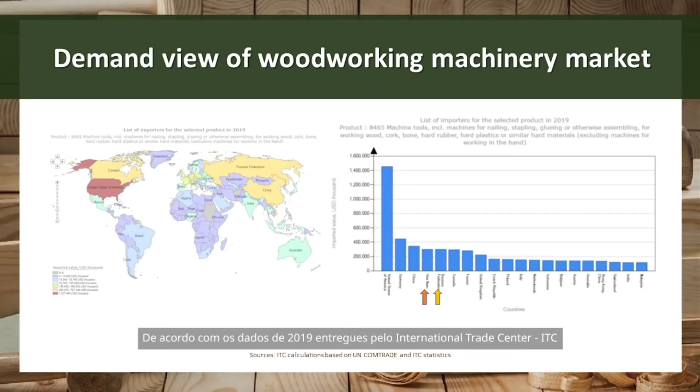Since Wood Taiwan is dedicated to promoting global woodworking machinery, it is very important to know who buys machines. According to the International Trade Center, ITC's data in 2019, USA bought more than $1.4 billion, standing as the world's largest importer, followed by Germany and China. Emerging markets, Vietnam, Russia, were ranked number 4 and number 5.

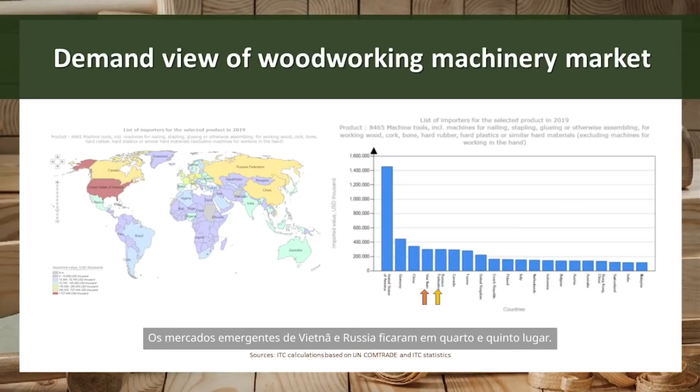On the other hand, when we examine the supplying side, Germany pops up to take the lead with exports of $2 billion, followed by China and Italy. And Taiwan was the number 4 supplier of worldwide woodworking machinery. In 2020, Taiwan shipped $700 million more US. And I would like to elaborate a bit further on what kind of machines we've shipped and who buys them from us.

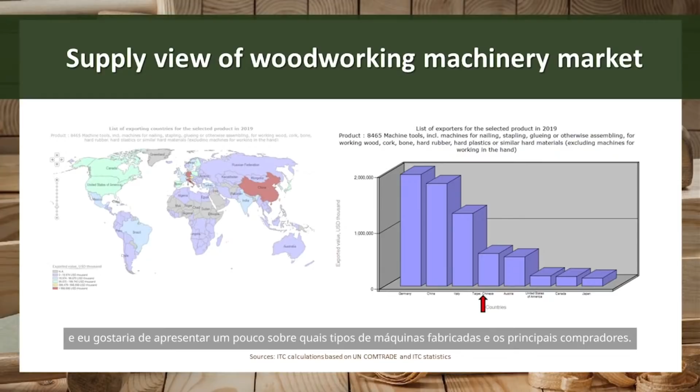You might ask, what makes us different from others? The main reason is we tailor machines according to customers' needs. Taiwan's machines enjoy a good reputation for high quality, reliability, and quick response to customers' demands after sales.

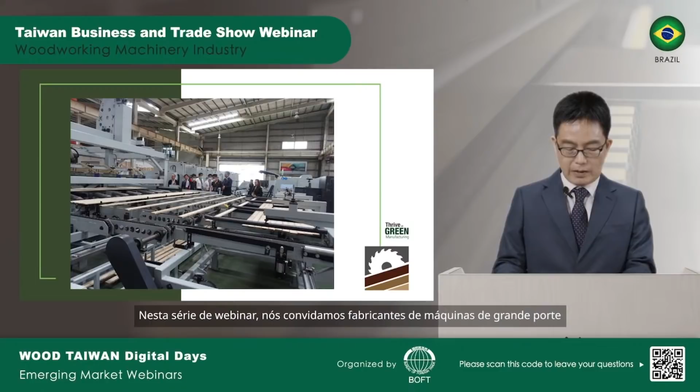In this webinar series, we've invited heavyweight machine makers from different applications, presenting their engineering crafts and solutions. Wood Taiwan is a perfect venue for you to explore the cutting-edge machines.

In the last exhibition 3 years ago, we had 167 exhibitors using 1,076 booths, showcasing their best products and know-how, attracting more than 900 buyers from the globe and nearly 5,300 domestic professionals to network with their counterparts.

The coming Wood Taiwan will be staged at TaiNEX 1. We look forward to your visit next year in Taipei. Thank you.

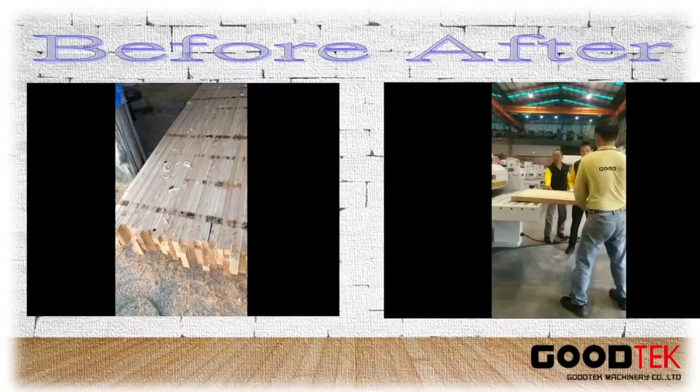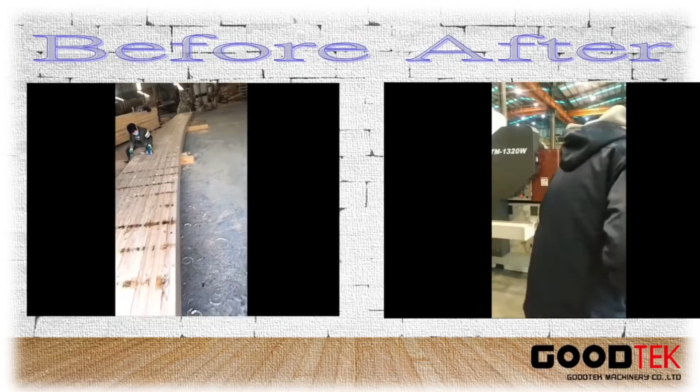You can see those are two videos. In the past, the worker usually planed a huge wood by hand. It costs a lot of time, human labor, and efficiency. Perhaps you will spend one day for just 2 or 3 pieces production, and the quality is not good either.

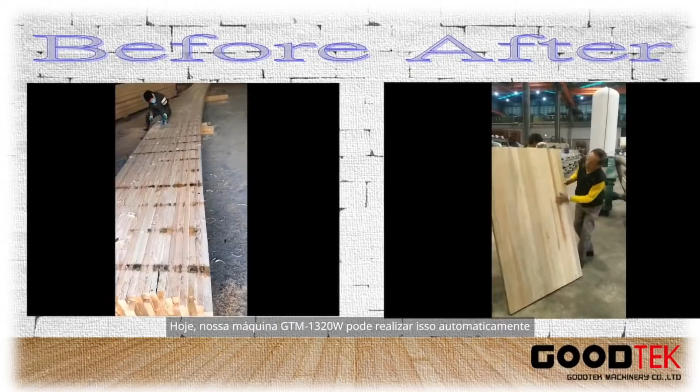Now our GTM-1320W can do this job automatically. You don't need to spend much time and human labor in the process. It saves more cost and makes more profit.

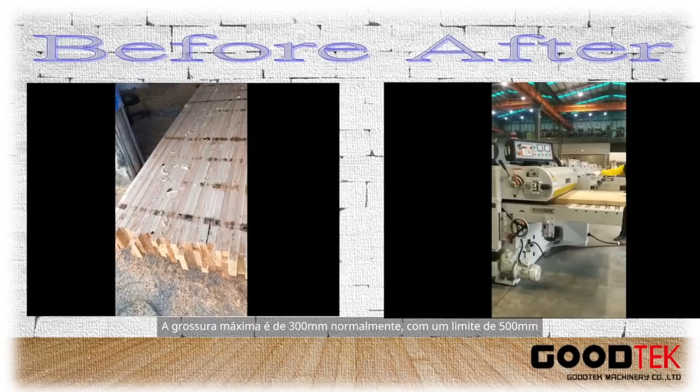For this model, the maximum width is 1,320 millimeters. The maximum thickness is 300 millimeters as standard, but we can go up to 500 as an option.

Now I am very proud to show you the demonstration video about our company and what our double-side planer can do for you. You can see our company location is in Taichung City, the center of Taiwan.

You can see this is our office. We have 30 employees in our office, our company.

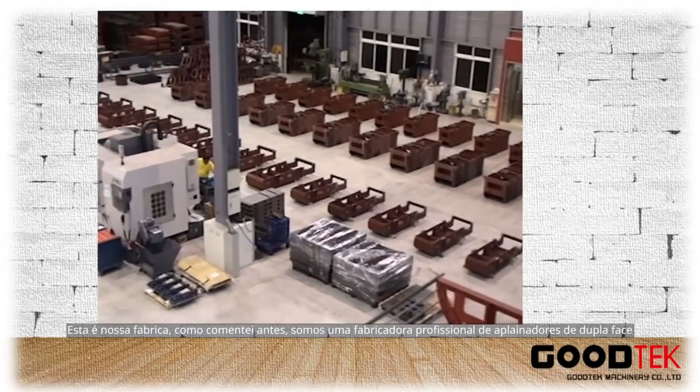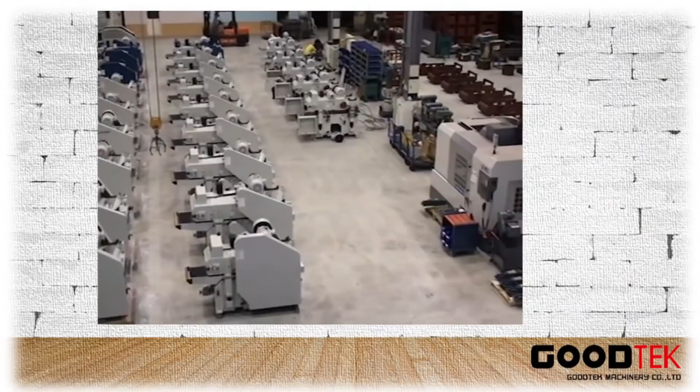Okay, you can see this is our factory. I told you before, we are a professional manufacturer of double-side planers, so we only produce this kind of machine, no other machines. We can produce 400 to 500 machines a year.

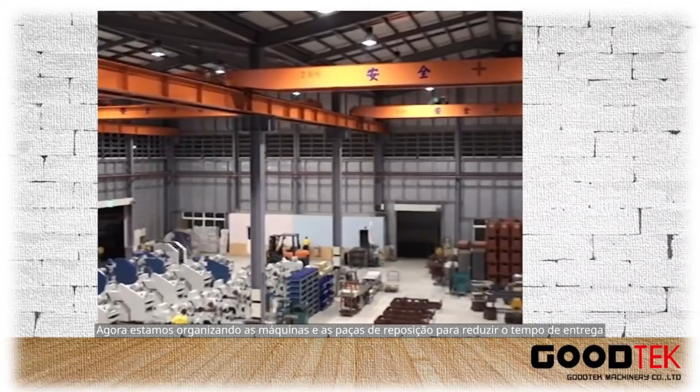Now we are trying to organize our machine and spare parts to reduce the delivery time of our products. The lead time for the machine is only 20 days. For spare parts, only 1 day.

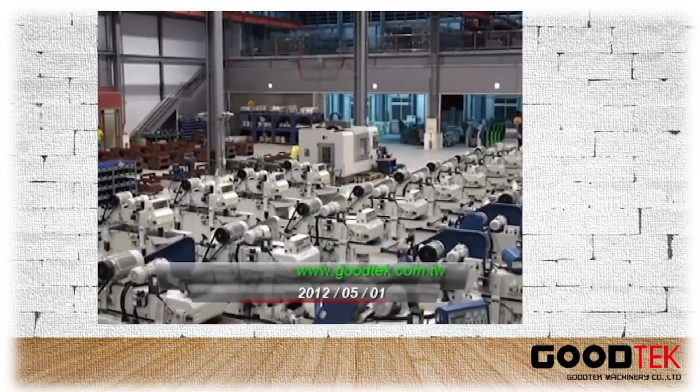Okay, you can see this is a factory in Indonesia. The model is GT6108.

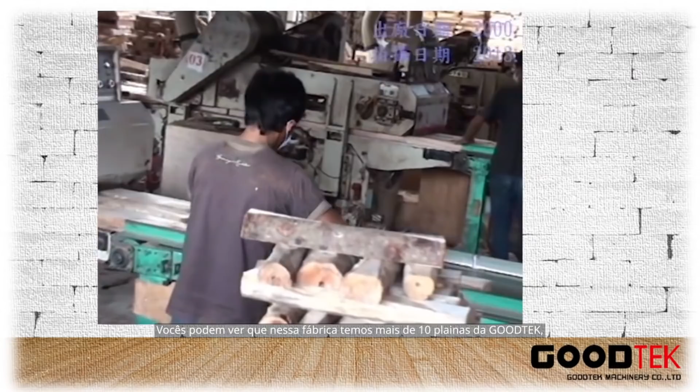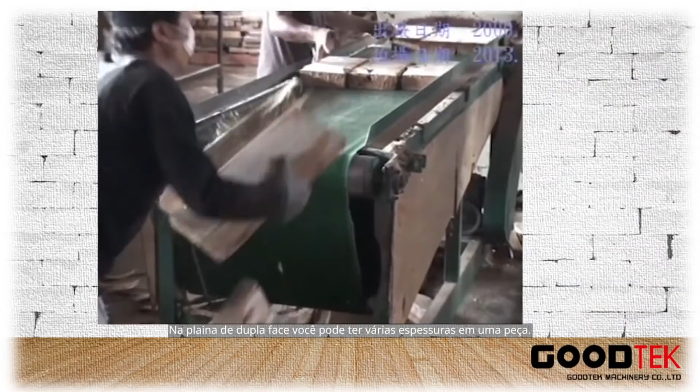You can see this factory has more than 10 machines of GOODTEK planer. Their production is very huge. For the double-side planer, you can put several pieces in one pass.

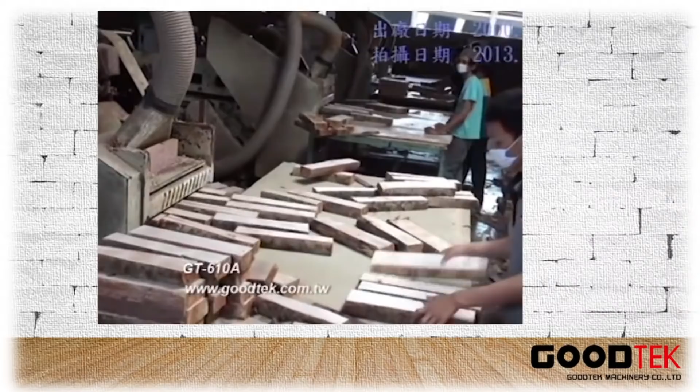Okay, you can see this is the final product.

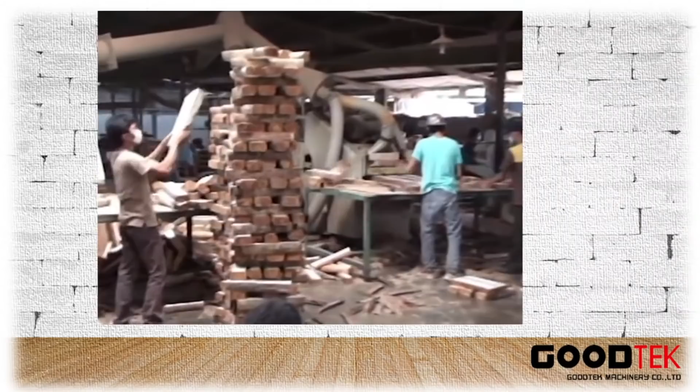Okay, this factory is in Thailand. Now it's planing the top and bottom surface.

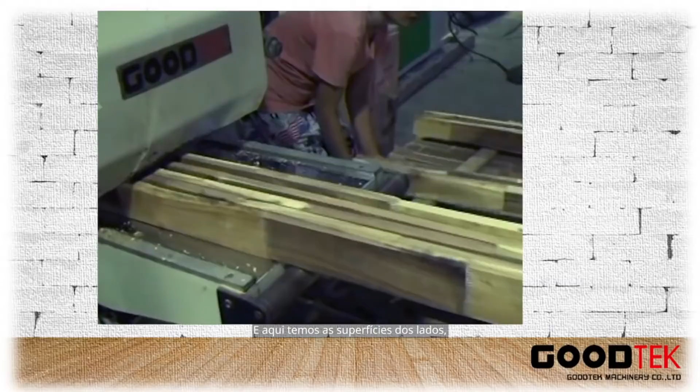Now it's planing the left and right surface. You can see the raw material is composed of small pieces using a finger jointer machine.

Thank you for your time and watching. If you want to buy a double side planer, you can choose the GOODTEK machinery. Thank you.

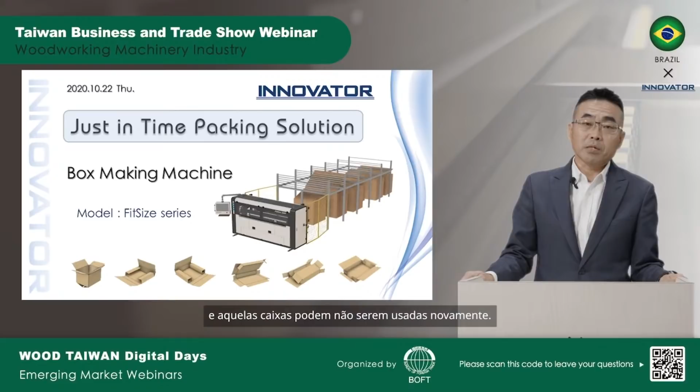Oftentimes when we visit customers, we see they have a lot of waste boxes in their warehouse, and those boxes may not be used again anymore. So the advantage we try to provide is that with these box making machines, we can make any size, any box style, any time, in an easy and more efficient way.

You will be able to stop wasting money and time on inventory boxes. You can also reduce the number of staff needed to check and locate these boxes as you need them.

We also can help you reduce the cost of fillers, like peanuts and air pillows, so you don't have to ship a lot of air when you do logistics on your trucks. We can carry the content to the customer safe and sound while minimizing shipping cost.

We also can help you reduce the shipping cost by reducing the unnecessary fillers. As a result, a better environment for our kids by fitting more boxes on trucks and airplanes. So consider all the benefits of our box machines.

You are able to produce FitSize boxes in an easy and efficient way. So here I would like to show you videos which will help you understand how the machine works and how it functions.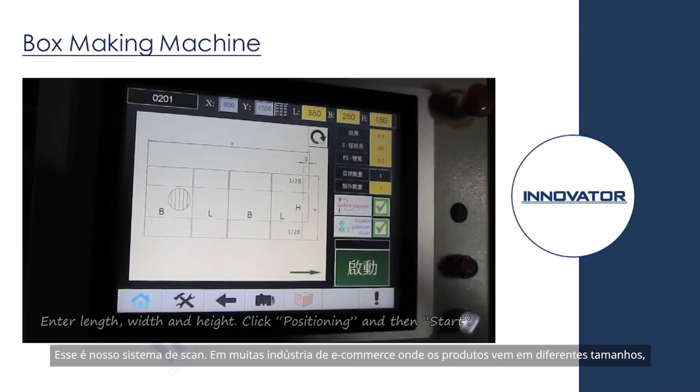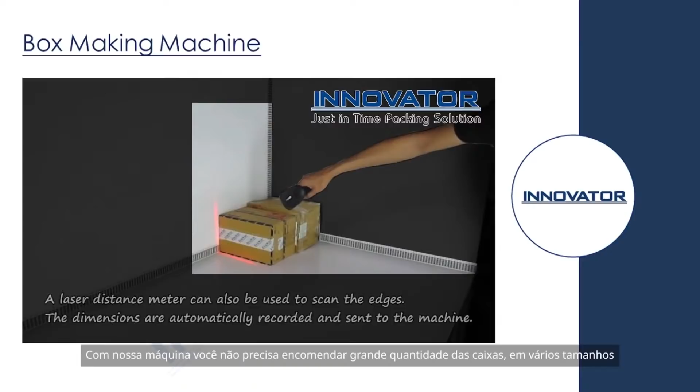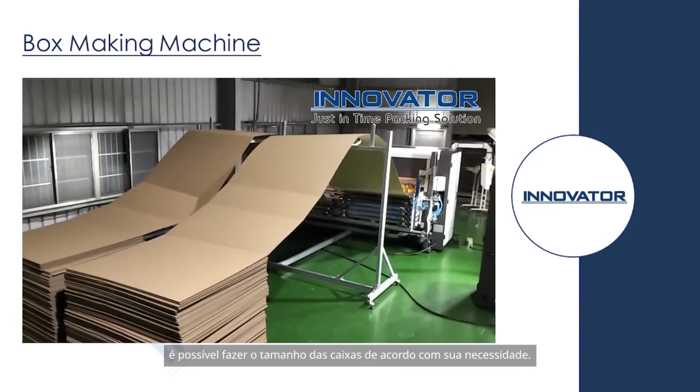In a lot of e-commerce industries where you want to pack contents that come in different sizes, you don't need to order a huge quantity of boxes. With our machines, you're able to make the box size just right to fit the content you're planning to ship. So let's get into a little detail about the machines.

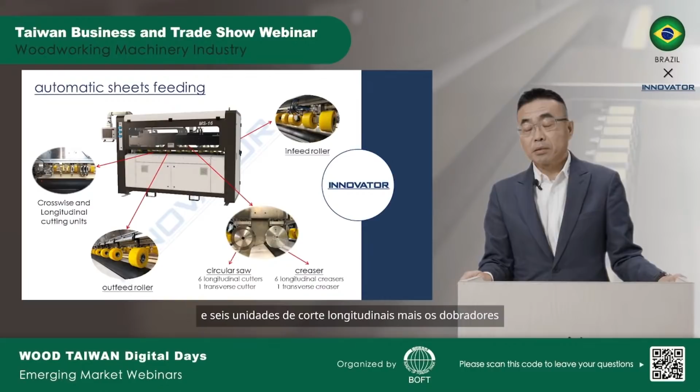Here on the PowerPoint, you can see we have the infeed rollers and the outfeed rollers. By standard, we offer 1 crosswise cutting unit, 6 longitudinal cutting units, and creasers.

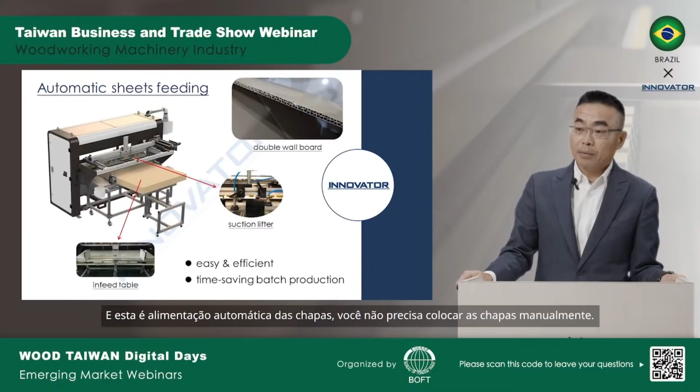This is the sheet feeding, automatic sheet feeding zone, so you don't have to feed the cardboard manually with your workers. You can also use what we call the fan-fold feeding system, which helps you feed the cardboard papers more easily and in a continuous way.

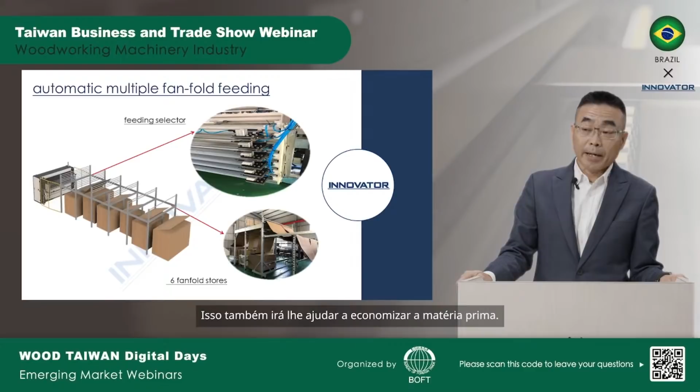You can also have what we call the side-by-side feeding systems, allowing two different widths of corrugated cardboard, to maximize the yield of your raw materials. We can also do a maximum of 6 fan-fold stores, and with our side-by-side feeding system, you can have a maximum of 12 different widths of corrugated raw material. Again, this helps you save a lot on your raw materials.

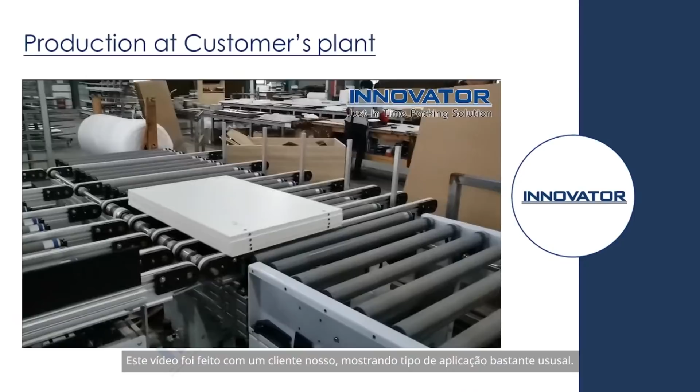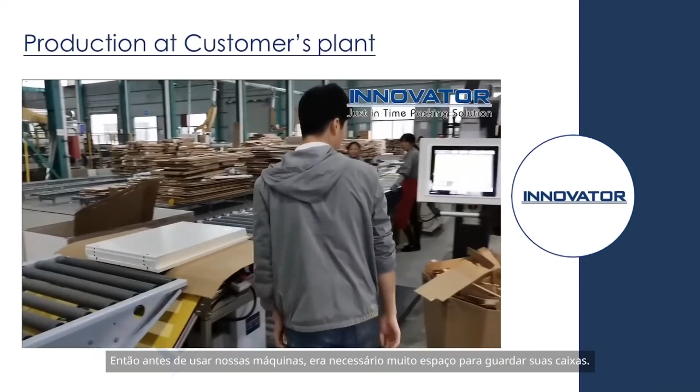This video was taken from one of our customers, a typical panel furniture producer. Each panel they produce comes in a different size. Before using our machines, they needed a huge amount of space. They had to order a huge quantity of boxes, which took up a lot of their warehouse space.

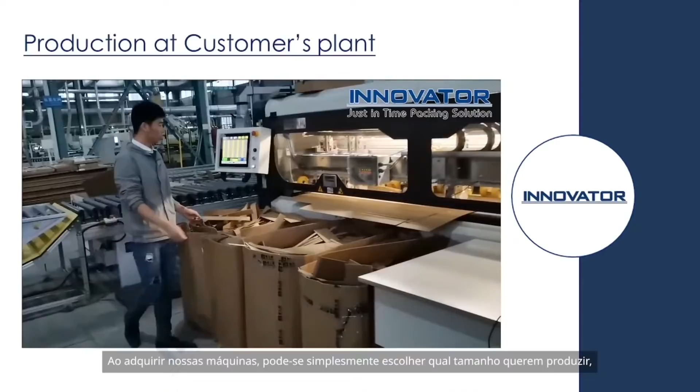By having our machines, now they are able to pack whatever size panel they produce in a very easy and intuitive way.

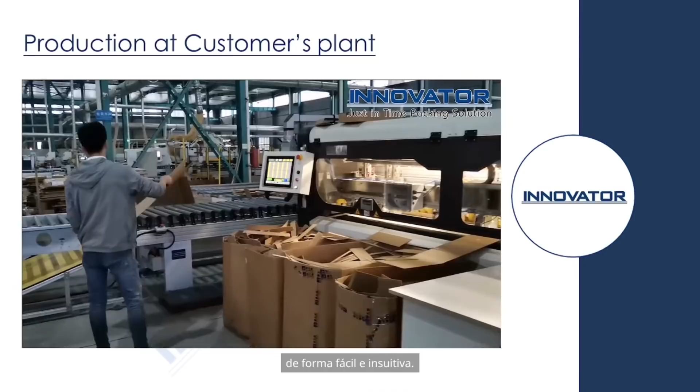The application of this box-making machine can be various. It can be used for door manufacturers, and a lot of different furniture packaging applications like chairs or different sizes of couches and sofas. So in a way, it helps you reduce shipping costs and helps you manage your warehouse.

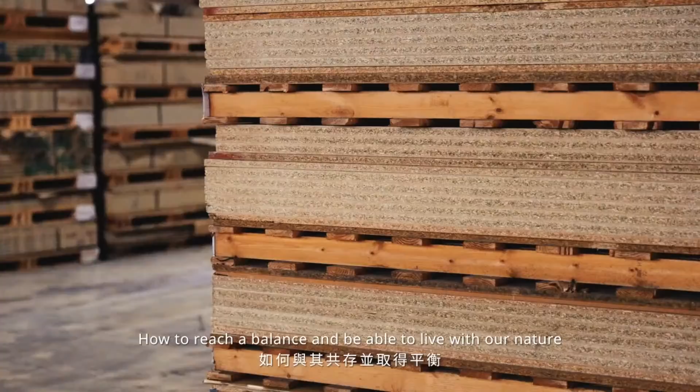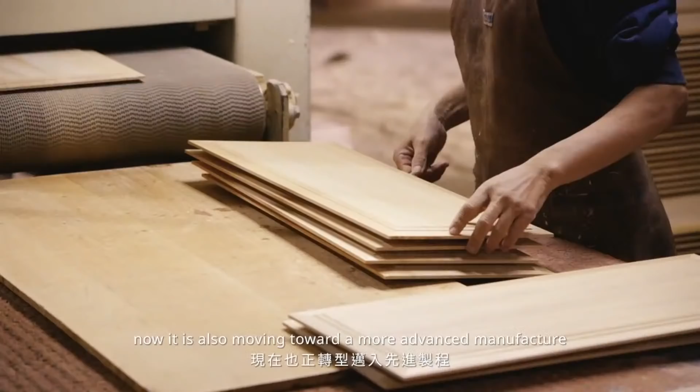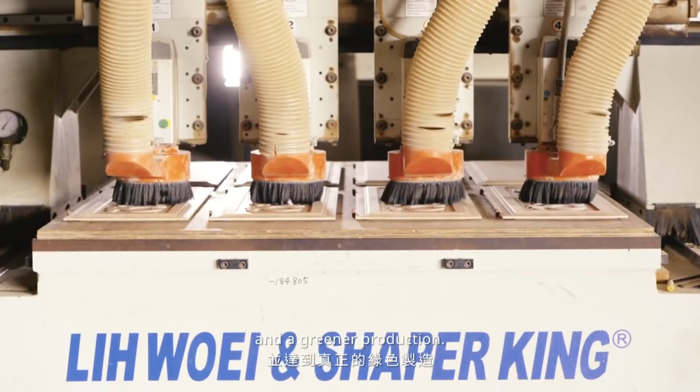Nature is the fundamental source for our human society and for all living beings. How to reach a balance and be able to live with our nature has recently become the most important topic. Same for the woodworking industry, serving as the initial material in industrialization. Now it is also moving toward a more advanced manufacture, aiming for efficient utilization of wood, higher precision with less waste, and a greener production.

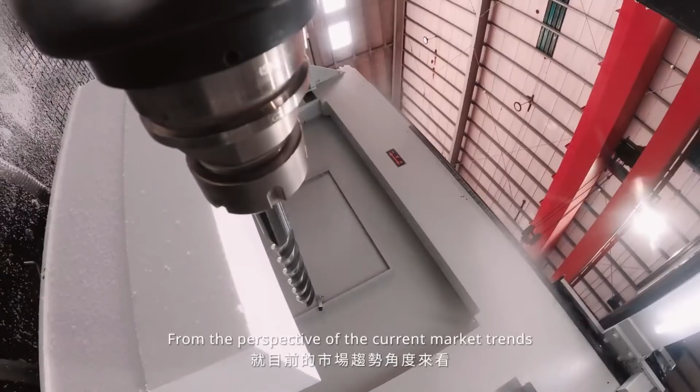We are trying to develop new technology to help our customers make more furniture and more woodcraft with less consumption of timber. So only the smart machine can solve the problem. We would like to make the machine different from the global market. From the perspective of current market trends, a flexible capability of the production system will be the best combination for future customer investment.

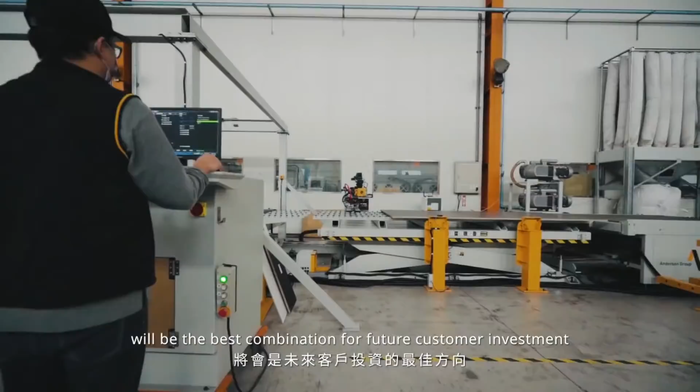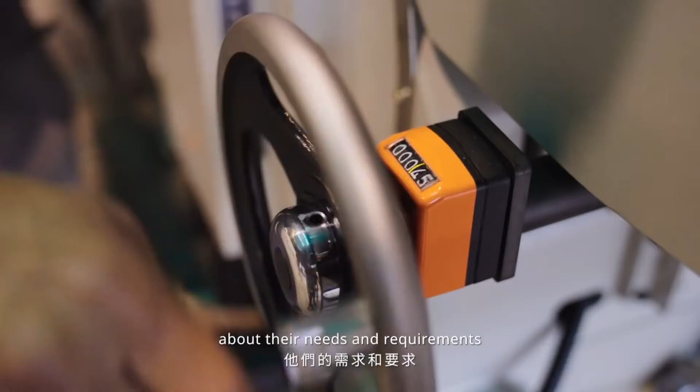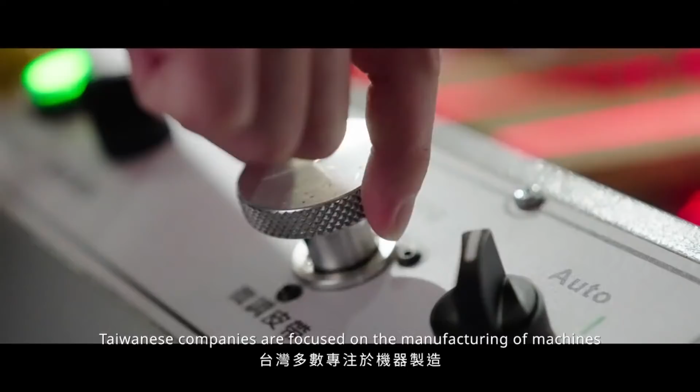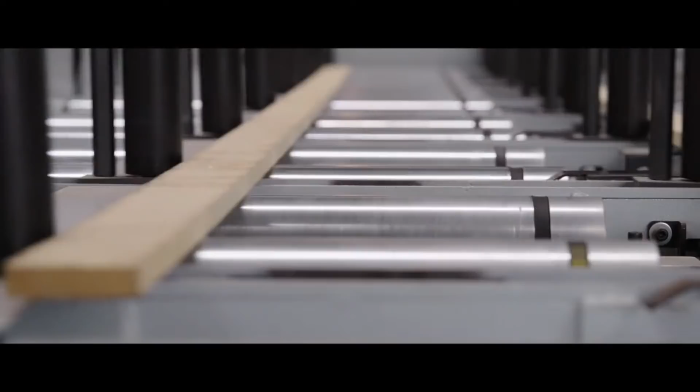It's a good opportunity for all customers to see different kinds of woodworking machines at the Wood Taiwan Show. We think the advantage of physical exhibitions is we can have discussion with customers about their needs and requirements. Taiwanese manufacturing is very strong on the product. Taiwanese companies focus on manufacturing the machine. They have professional skill, so whenever a customer has a special need, we can modify something for them. This is also our advantage.

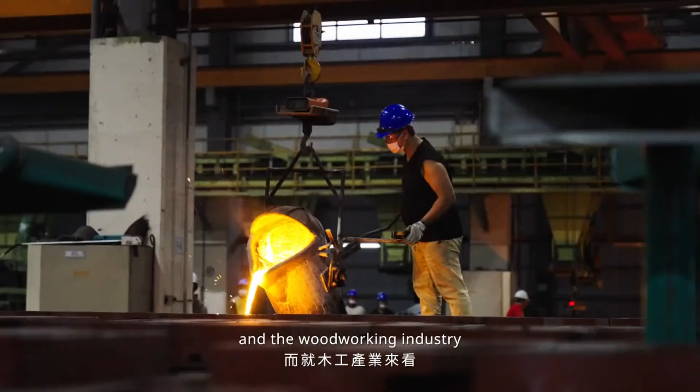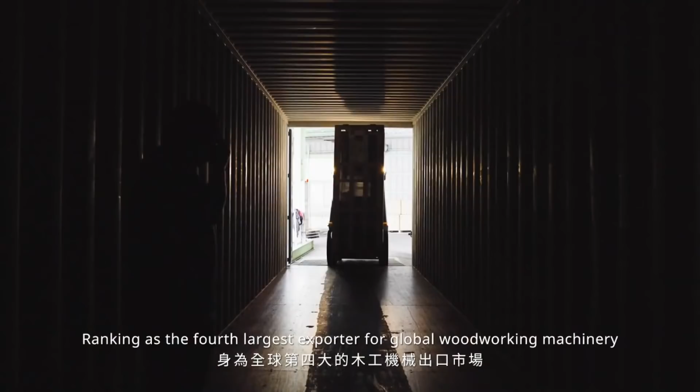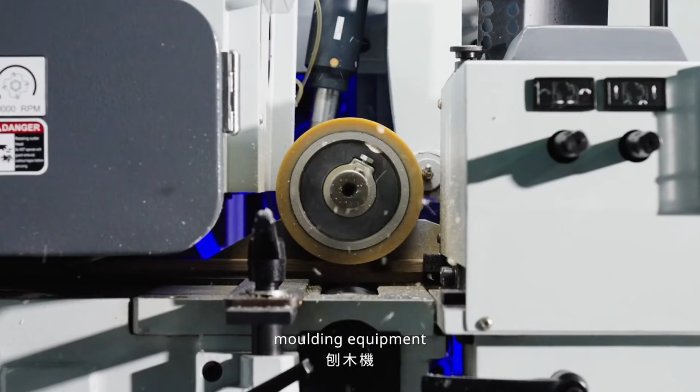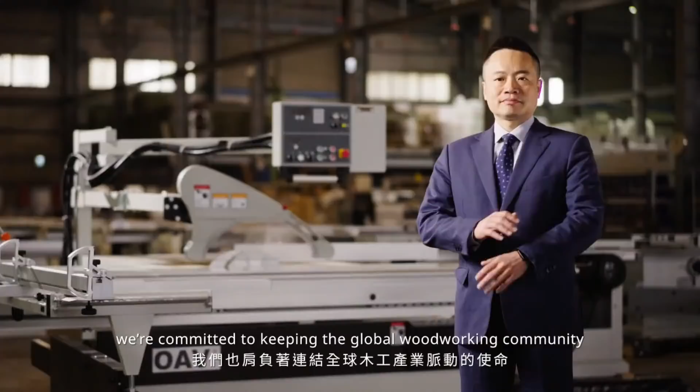2020 has been a challenging year, and the woodworking industry, not just for us in Taiwan but for the whole world, continues to adapt in 2021. Ranking as the fourth largest exporter for global woodworking machinery, Taiwan has been a major producer of reliable sawing machines, moulding equipment, sanding machines, jointers, and tenoning machines. At Wood Taiwan, we are committed to keeping the global woodworking community connected and informed, with the ultimate ambition to shape the future of green manufacturing.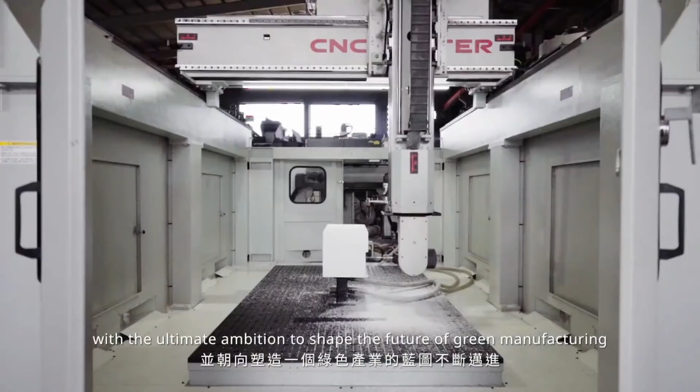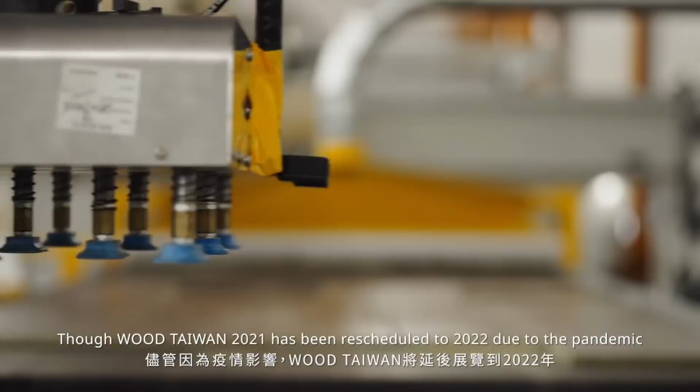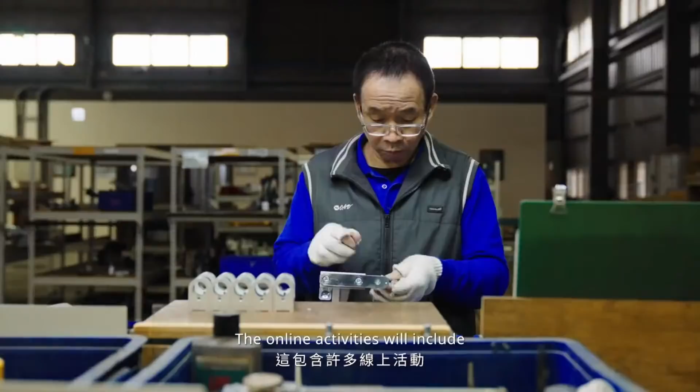Wood Taiwan 2021 has been rescheduled to 2022 due to the pandemic. Wood Taiwan Digital Days from April 22nd to 25th will keep you updated on the latest developments about Taiwan woodworking machinery. The online activities will include Wood Discover factory tours to leading exhibitors, webinars for hot product launches and market opportunities, and online business matching meetings. And even more is yet to come, with more than 150 exhibitors expected both online and on the showground in 2022.

Wood Taiwan will be one of the great opportunities to meet with our leading Taiwanese exhibitors, both online and later at the showground in 2022.